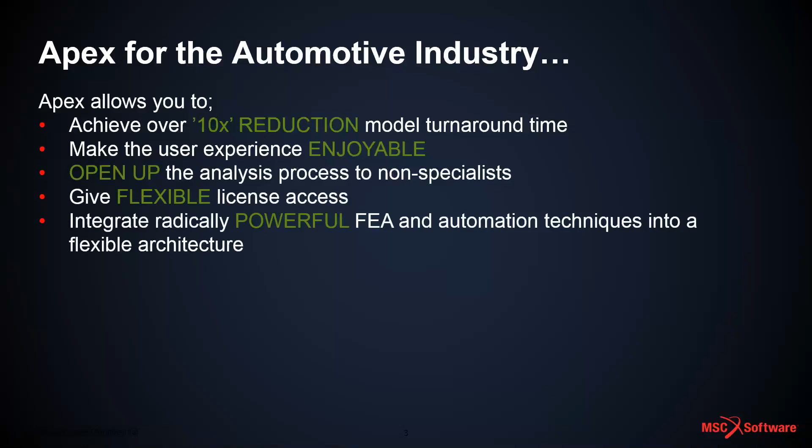Within Apex, as I mentioned, there are some very powerful FEA and automation techniques built into a flexible architecture. Apex is one of the very few direct modeling geometry engine enabled CAE platforms, and is also generative in the sense that model changes upstream are flushed all the way back to the beginning, resulting in minimal manual intervention by the user and hence massive time savings in terms of build, solve and post-processing.

These capabilities, or the need for an effective CAE tool set, is very prevalent within the automotive industry, both in terms of getting product to market and also the importance of robust FEA in the development process. And all of that said, Apex gives you, the engineer, the design freedom to develop your current and future products in a manner you have never seen before.

And trust me, this has changed the way that we work in our engineering consultancy, and hopefully you will see some of that yourselves. So, the Apex journey.

So Apex was first released about 4.5 years ago. Some of the early releases were focused more on the sort of CAD to mesh type stuff with the direct modeling geometry engine that I mentioned - very easy to use, very fast to build models and very fast to update.

We then moved on with subsequent releases to include the Apex structures embedded solver, and that was very useful in terms of running the full design loop or the full analysis loop and making changes, any iterative modifications we need on the structure to ensure integrity.

Then we moved into the integrated and revolutionized flavor of Apex, for want of a better term, with some of the later releases. The key enabler here was the inclusion of the Python scripting language application programming interface, so the Python API, which effectively means that Apex can be customized and automated almost beyond any boundary in terms of user input and company best practice.

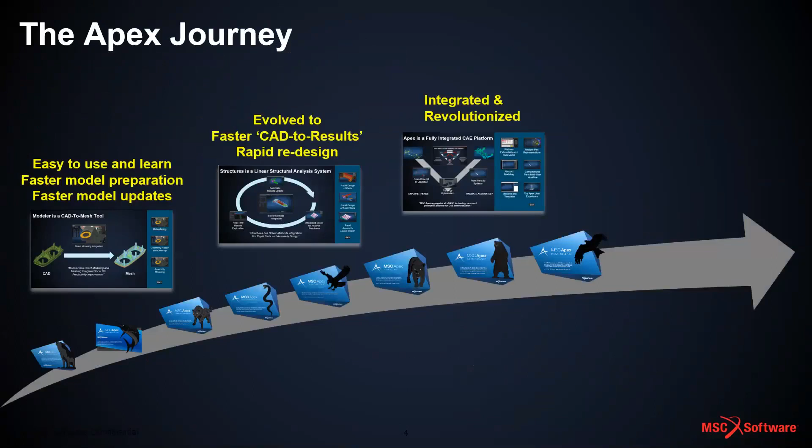So that said, listening to the market, MSC decided that there was a subtle change required and a paradigm shift to enable the latest release, MSC Apex Iberian Lynx, in terms of its interoperability with MSC Nastran. We've opened this up with this release - we're calling it a gateway to Nastran, or Apex for Nastran, in the sense that Apex can now write fully functioning model data files out of the Apex environment, be solved externally with Nastran, and then post-processed for result exploration back in the MSC Apex environment. That's all been achievable with the latest release, Iberian Lynx, which we'll be focusing on today.

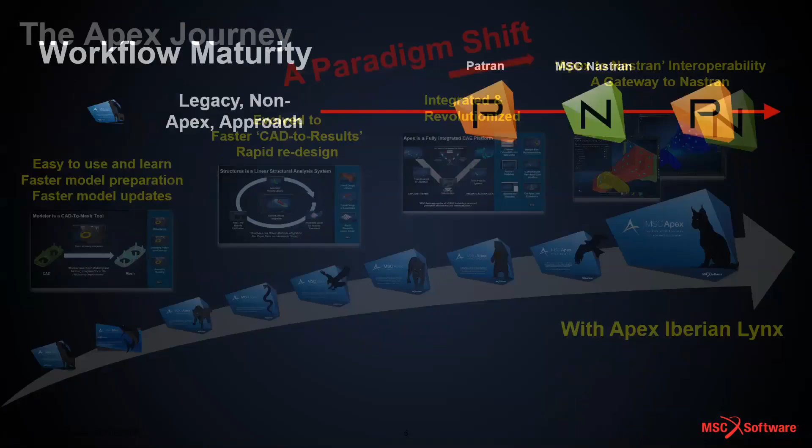In terms of workflow maturity, and I'm sure many of you will be familiar with this, before Apex was around, the legacy approach would be focused on Patran or third-party tools for both pre- and post-processing, wrapped around the sort of core Nastran functionality that's used across many industries and definitely across the automotive industry.

As Apex came in, very, very powerful over legacy tool sets in terms of the CAD to mesh type operation, but somewhat limited in terms of the finer points of the nuances of model build in terms of model attribution, loads and boundary conditions, load case setup, that type of thing. So it was used as a companion where it would be focused upstream of Patran or another third-party preprocessor before then the Nastran solve, and then obviously we'd be looking at some of the tool for post-processing.

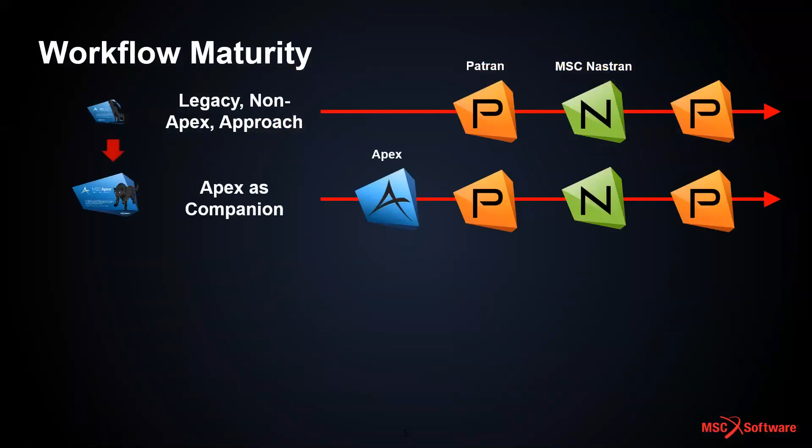As Apex has developed in maturity, it became a fully functioning preprocessor. So the full model can be built in the Apex environment, certainly for given analysis types, then run in Nastran, but then we were limited to not being able to post-process, so we had to look elsewhere for that activity. But now, with the introduction of Apex for Nastran through the Iberian Lynx release, we now have the fully functioning preprocessor, Nastran solve, and then fully functioning post-processor for result exploration.

Okay, so we'll just talk about some of the functionality growth. So Apex, in its companion mode through some of the early releases, supported a number of Nastran keywords, but was quite limited in terms of analysis support. Once we then moved into additional releases, we've now got Apex as a fully functioning preprocessor, so we've got more keywords supported, both import and export, and also the ability to set up for a number of different solution types. We then move into the arena where we are now with Apex Iberian Lynx.

So we've got far more mature MSC Nastran keyword support. We've got analysis setup and solution types for external Nastran runs, but also using the embedded Apex structures solver technology. We've also got the ability to explore results through the Nastran external results HDF file format that can be imported into the Apex environment. And we've also introduced at this release the concept of orphan mesh support, whereby we can read in legacy Nastran bulk data information.

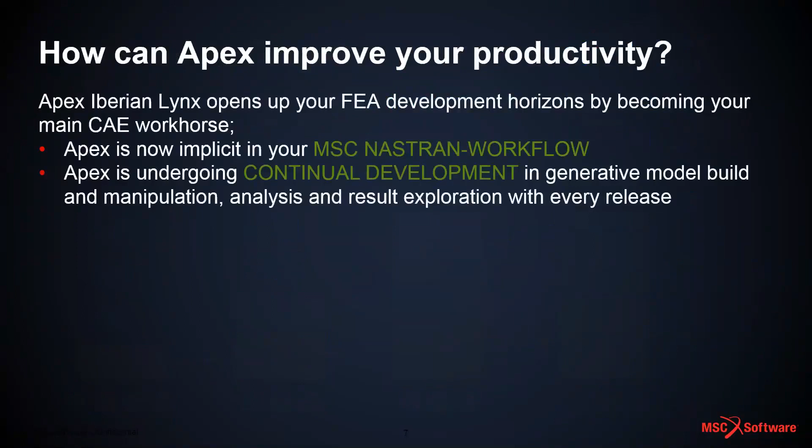Okay, so how can Apex improve your productivity? Apex is now implicit in many MSC Nastran workflows. So we're now at a stage where some of your legacy pre and post processing technology, in simple terms, can be ditched and replaced with Apex to see full advantage in terms of the efficiency gains and ease of use that we've got. Apex is undergoing continual development with every release, both in terms of model build and manipulation, analysis and result exploration.

We have, as I mentioned, the Python-based automation environment, so we can automate many aspects, or pretty much all of the aspects of the model build process. But with the advent of Iberian Lynx, we now can automate analysis and results exploration up front. And this is all enabled through the customizable graphical user interface, and we now have the ability to allow users to create their own tools and forms to almost their own company specific workflow.

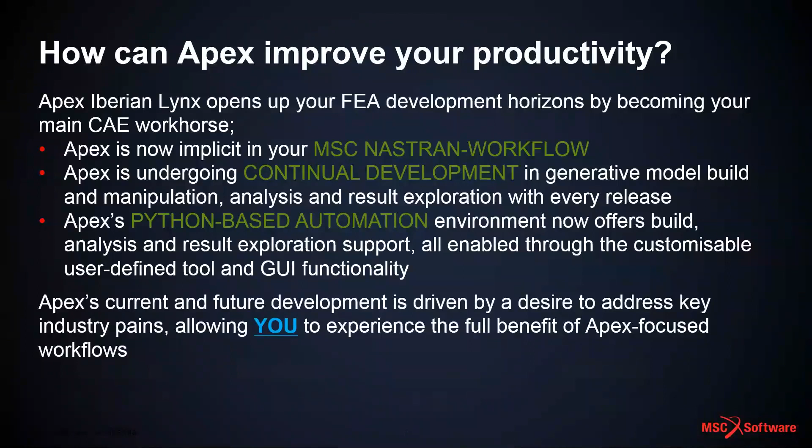Key thing here is that the development of Apex is totally focused on a desire to address key industry pains. The key thing here is that you will be able to experience the full benefit of Apex focused workflows now and in the future.

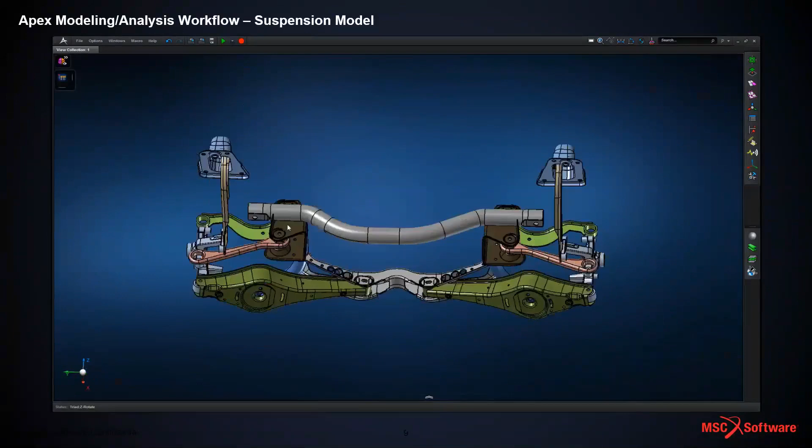Okay, so with that said, we're going to move on to some demonstrations now, looking at typical automotive industry focused functionality. So the first thing I want to look at, and some of you may know the Apex environment, some of you may be new to this environment, but I just wanted to give you a flavour of a very simple build, but some of the functionality that we've got. So this video is based around the model build for a suspension assembly. So this geometry has been read in from an external Parasolid CAD source, and we can see some of the key components in here. We've got the knuckle, the upper and lower control arms.

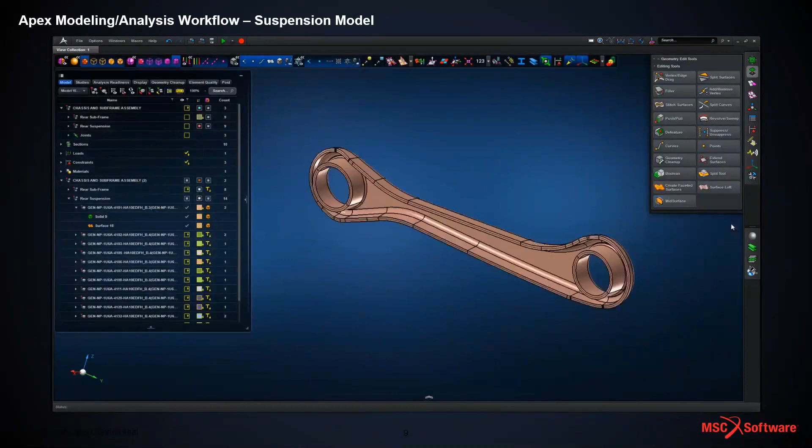So if we focus on the lower control arm first of all, just to illustrate some of the simple yet powerful model build capability we've got. So this is a thin formed structure. So we're just going to mid-surface that structure using the default options in Apex. So we've got a surface that's fully tied together. We've got the shell properties generated by default.

We mesh that surface to give us our 2D shell mesh for this type of thin shell structure. And we can now check our element quality. So we get a live feedback in terms of our element quality update. And we can see we've got a number of invalid elements. So we've got some very thin faceted surfaces.

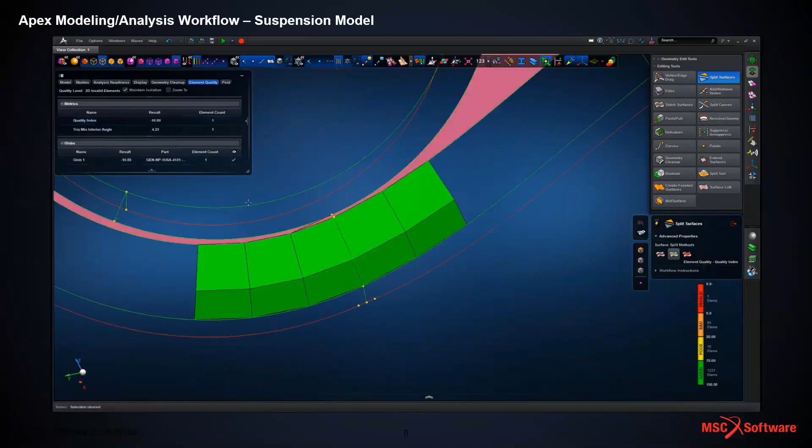So we're going to just use some of the geometry manipulation tools. And again, Apex being generative, the geometry is tied to the mesh, which is in turn tied to the property, and also the element quality in this case. So as we make these changes, we update the geometry and the mesh, and the poorly shaped elements disappear from view, and we've removed them from this part within the master assembly. There's a number of ways of doing this, but this is just illustrative of the generative nature of Apex.

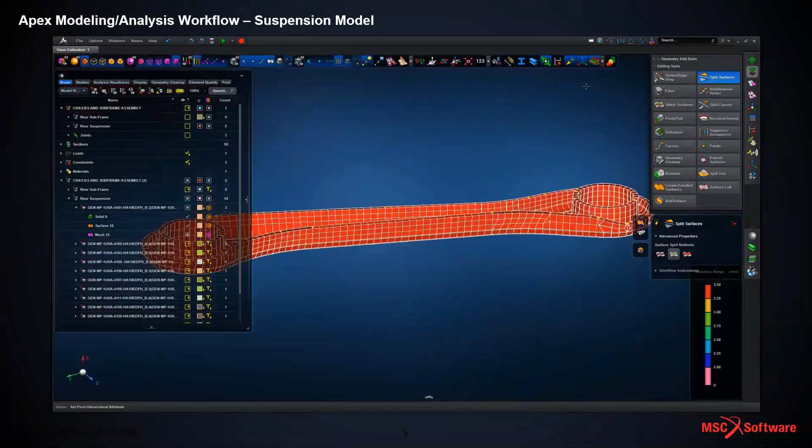So if we now view the resultant mesh, we can now check things like the resultant shell thickness. So we haven't had to re-attribute properties. They're all tied through again through the generative nature. So minimal mouse clicks, big time savings potentially for more complex models.

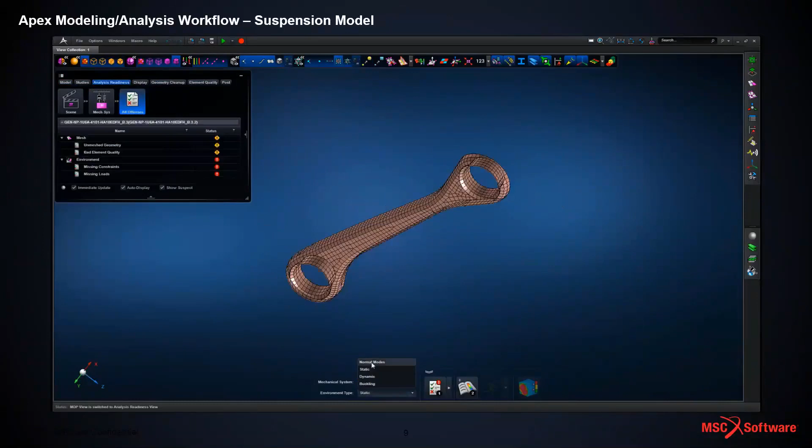Verifying element normals. And then one key thing that we have within the Apex environment is the ability to run the Apex structure solver. Now this could be for production level output, but in this case we're using it for a simple verification run, just to make sure that this part of the model is tied together and is working as a true FEA description of the part we're trying to represent. So we're just running a simple normal modes analysis.

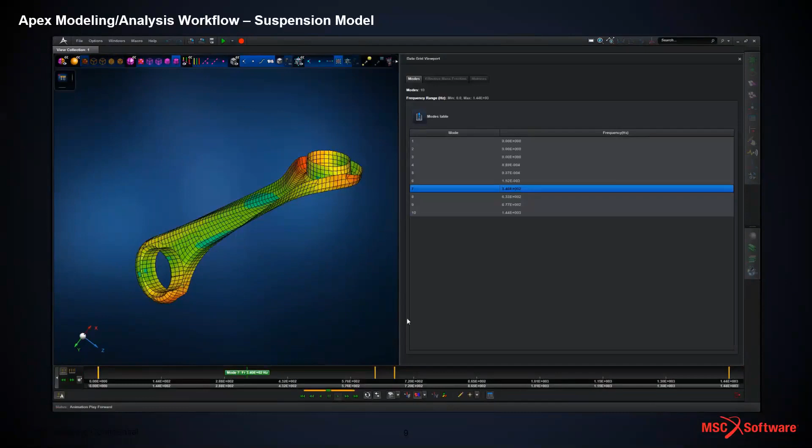This takes us through into the post-processing environment, and then we can look at the table of modes and the frequencies that are developed, and just look at the mode shapes just to ensure that they make sense and the structure's tied together. So obviously this is a free normal modes analysis, so the first 6 mode shapes are rigid body.

So once we've built all the parts and verified them within the assembly, we can bring them all together. This full model process with static load output took less than an hour, so we have very good efficiencies in there. So some areas of the model where we've got parts which will be welded in reality, we're just going to idealize that connection with a glue contact meshless technique just to fasten 2 parts together.

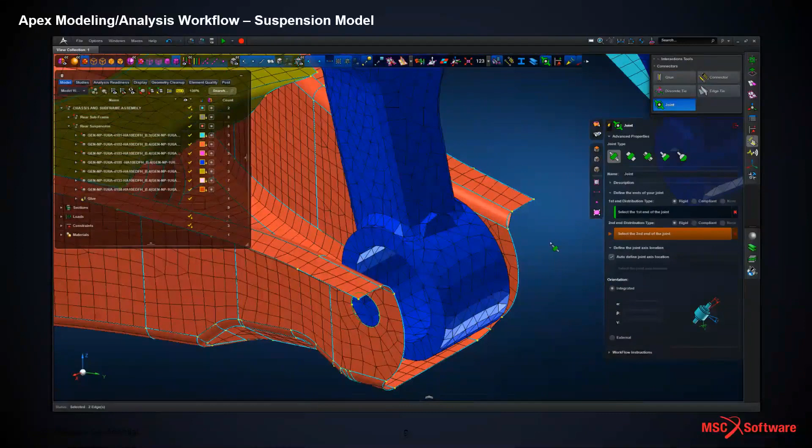We've got the concept of joints, which are new to the Iberian Lynx release, and this allows us to specify many different types of joints. So we're going to specify a revolute joint, which is representative of a pin and a shaft with a bearing connecting these 2 parts together. So we just specify the end curves connecting the red shell component or the pinky shell component into the face of the blue detailed mesh component, and middle mouse button to accept.

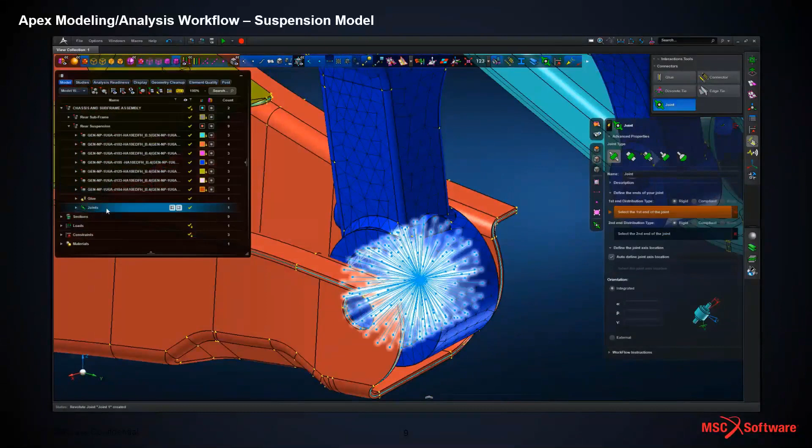We can modify the position and the orientation if necessary, but these are concentric holes, so we're good to go with the good quality geometry. So we can look at the joint definition. We have it in the model browser tree.

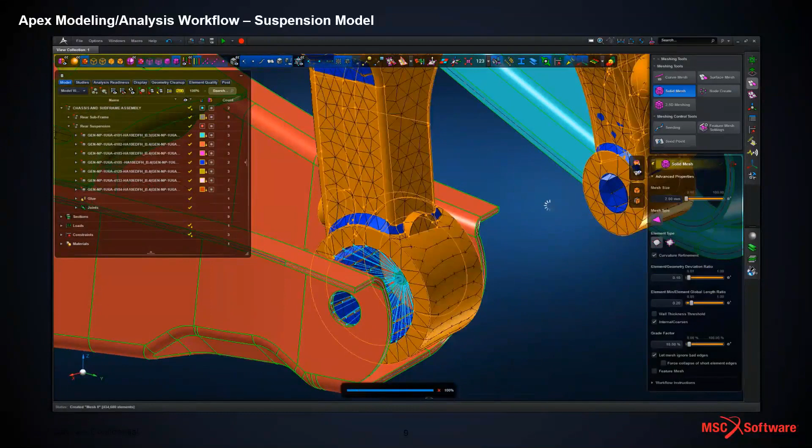Once we've got that defined, we're just going to illustrate here again some of the generative nature of Apex. So we're going to remesh the knuckle, the solid mesh knuckle in this suspension assembly. So as that mesh is updated, the joint is updated as well. So the generative nature of Apex has flushed those joint connections through to the newly defined model.

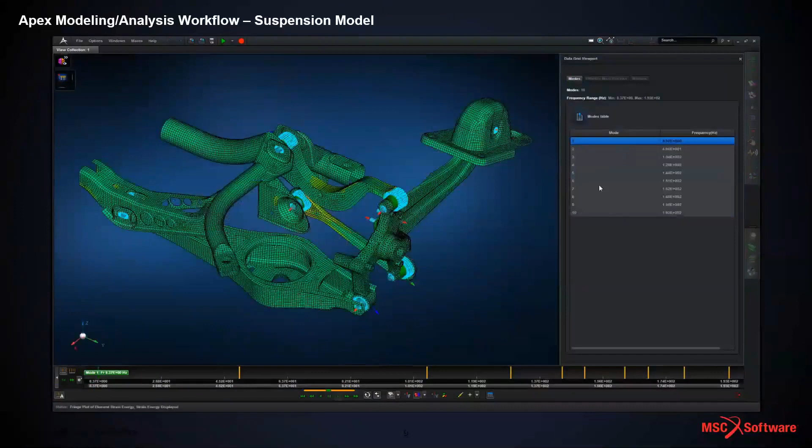Running a normal modes analysis, just again as a verification, we can see how those revolute joints are working and that the structure is all tied together and behaves as it should for a structure of this sort. Again, just a quick strain energy plot to show where the peak loads may well develop from a dynamic load case.

So we're now going to run, just for illustration, a simple static load case, linear static. So we've got a number of constraints and a symmetry boundary condition. Again, very straightforward to define this in Apex. And then a very quick response, both in terms of the shell and solid stress output. We're just looking at von Mises for the lower control arm, just as an illustration of what we can do with Apex.

So again, just an overview. Took less than an hour to build that complete assembly, so hopefully some idea of the efficiency gains that we can see, and obviously we can take that on to more involved models at your leisure, really.

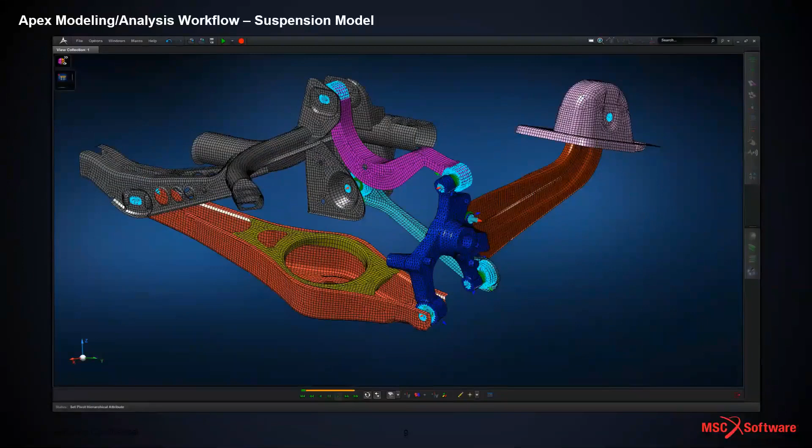Okay, so looking specifically now at how Apex interacts with MSC Nastran. So Apex can be fundamental to your current and future MSC Nastran. I'd probably caveat that to say that Apex is fundamental to your Nastran-based workflows, in the sense that we have now enhanced MSC Nastran keyword support for both model import and export, and the bulk of this is obviously default Apex behavior.

Obviously with the Python enabled automation environment, we can extend that almost on a company by company basis. We've got the ability to interrogate results through the attachment of the MSC Nastran new format, the HDF5 result format. Well, I say new, it's been in industry for a number of years now, but we can take advantage of the powerful result exploration and automation capabilities within Apex.

And then this simple infographic just shows on the left hand side the number of supported BDF keywords which can be imported and exported from the Apex environment, across coordinate frames, multi-point constraints, materials and properties, model definition, and loads and boundary conditions. The red bars are one of the early Apex releases, Diamond Python, and now the grey bars show Iberian Lynx, and we've got a massive increase in the number of supported keywords.

On the right hand side, I didn't really want to bore anybody with table after table of supported keywords. This is just a word cloud that shows some of the range and breadth of keywords supported within the Apex environment.

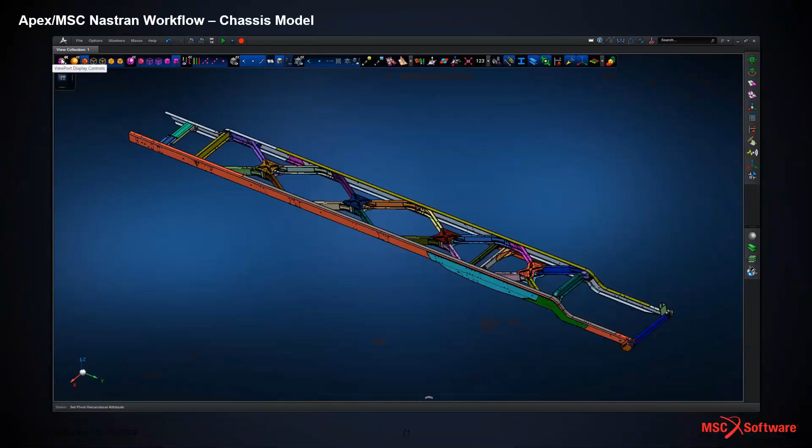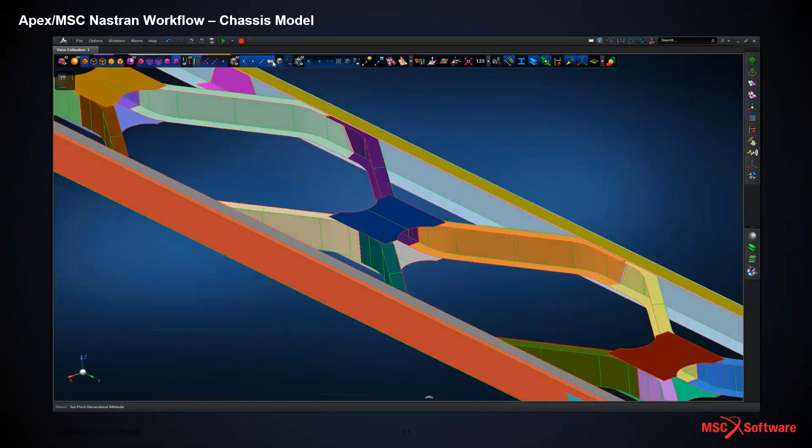Okay, so look specifically at the MSC Nastran workflow. This is for a slightly more involved model now. So we've got a chassis model with maybe 120 discrete parts in it, and I think this came in as a CATIA assembly. So we've got the original solids. We've been through some mid-surfacing operations, again very straightforward, using the direct modeling geometry engine in Apex. We can look at the resultant mesh.

So we've got a reasonable mesh distribution for global stiffness and strength cases. We can look at the shell properties that have been defined by default as part of the mid-surfacing. And one aspect we touched on earlier is the ability to do a meshless connection using glued contact, which is prevalent throughout many aspects of Apex. That showed the glued contact, which in fact is a series of explicit MPCs under the hood. And we look at the glued contact on the sub-assembly level for one of these cross braces, and see how the model is tied together.

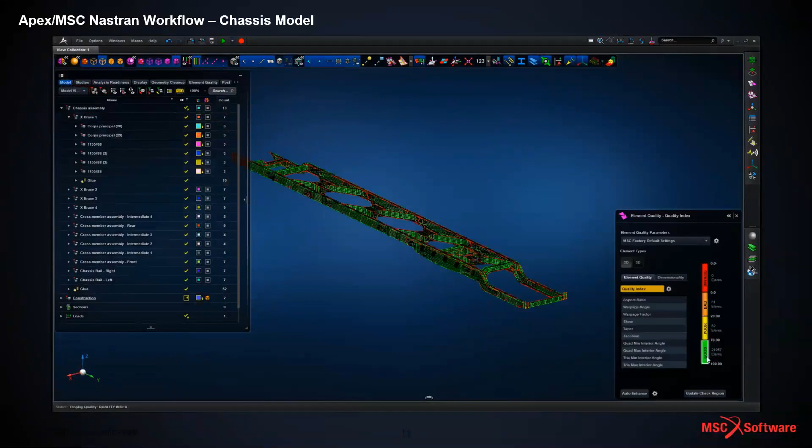And of course, we could run a verification load case or normal modes load case at any level within the model. We're just doing a quick check here on element quality. We could check free edges, element normals, that type of thing. So once the model is built, we can apply a number of constraints and some forces and moments into the structure. Again, a very simple load case, but illustrative of the type of stuff we can now do within Apex.

So once we have the model built, we can now place what we call an analysis study. That effectively becomes the target for the model, and we can specify that we want to create a scenario, so a single or a series of load cases, and we've got full control over that definition. And once we've got that, we can export the Nastran data. We can set the units. We can specify whether we want to export a single file or a multiple include file basis.

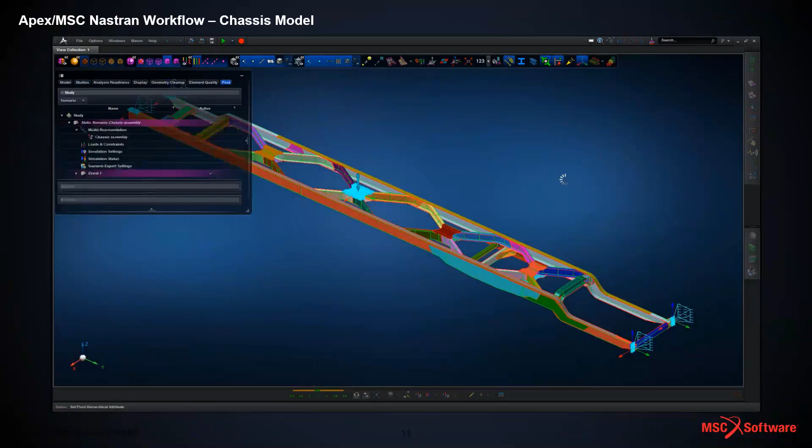And once we've run the Nastran job, we skip the step here, we can then read the Nastran result file back into the Apex environment, go into post-processing, and we've got full control over the contemporary result exploration tools available in Apex. So just a very quick animated fringe plot looking at von Mises stress across the shell elements. Pretty straightforward, simple structure, but very quick to build and verify and get production level results out.

Okay, so the next quick demonstration is the concept of the orphan mesh workflow, again for this chassis model. Just to reiterate, orphan mesh is when you work from the source bulk data file, maybe a legacy Nastran model. You perhaps don't have any CAD to support the full model build, but once that geometry is read in, you can remesh, regenerate, and modify the mesh at your leisure.

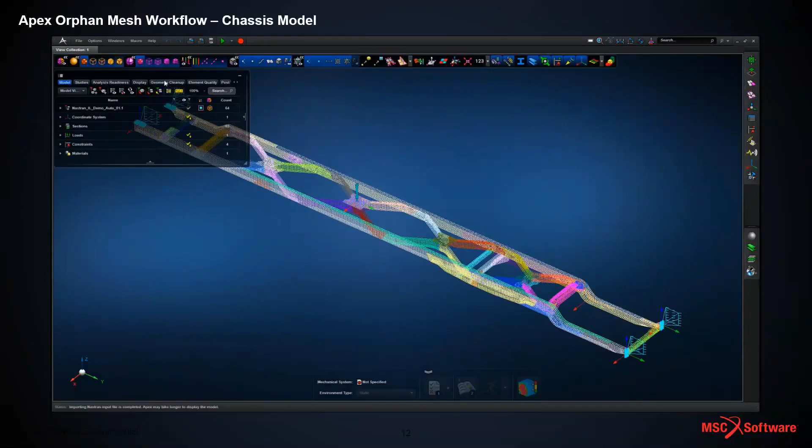So we're specifying the import of the original bulk data file for this chassis model. We can specify the unit system and how we want to organize the model. We're importing this model as a series of contiguous mesh parts, so each discrete mesh has its own part within the subassembly, which makes it very easy to manage from the model browser tree. And we can see some of the local detail as we looked at previously.

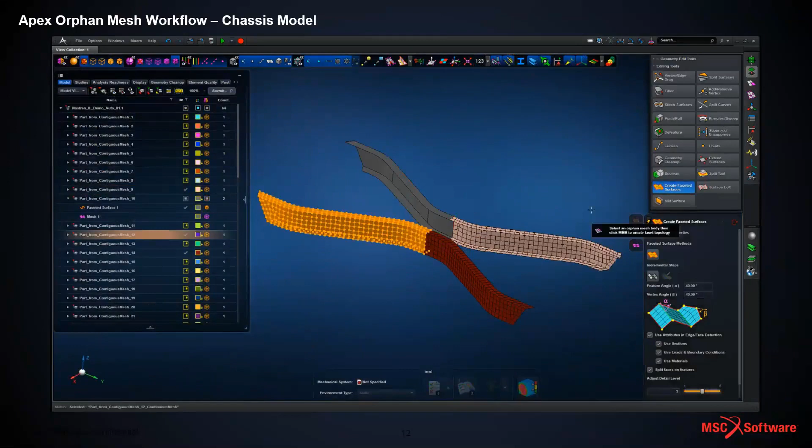So left-hand side now, as we click on those entities, we can highlight them in the model browser tree. And what we're going to do is convert that mesh, the orphan mesh that was read in, into a series of faceted surfaces, so into a series of geometric entities. As we do this, the shell properties that are used to populate those surfaces are stored internally, and we are now in the position where we can remesh, modify this geometry to give us the structure that we want to see.

So bringing the original mesh back into view and then highlighting those meshed entities that we've used to generate faceted surfaces within the model browser tree, we can now delete those original meshes. They're no longer required. They're surplus to what we need to do. And we're left again with faceted surfaces, as you can see in the browser tree, and these surfaces can be exported to CAD if necessary.

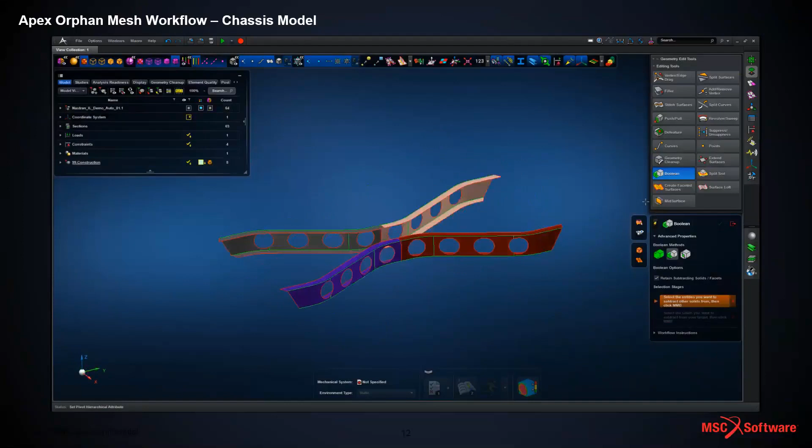So once we've got those faceted surfaces created, the original mesh removed, we're going to modify them. We've just got some simple operation here. We've created some cylinders which we're going to subtract from those original surfaces using a Boolean operation, again using some of the very powerful direct modeling geometry tools. Remesh those faceted surfaces. So those surfaces now are populated with the original shell property. We can modify those if necessary.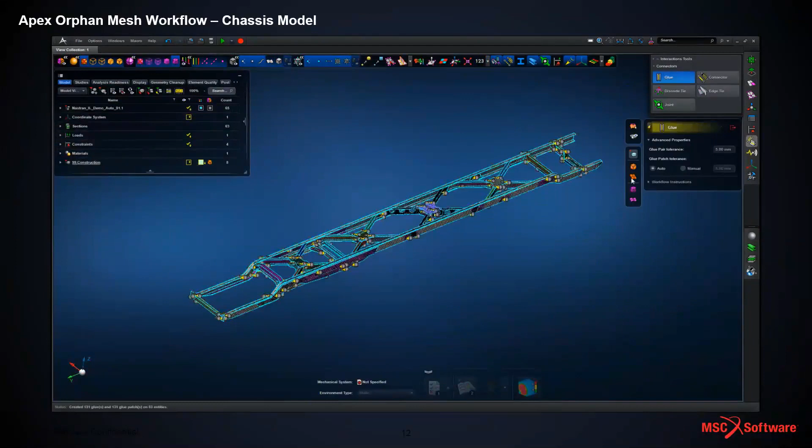Bring them back into view, bring the full model back into view. We're going to use the glued contact to tie this all together. Again, single sweep based on the glue pair tolerance, and we're good to go in terms of our analysis. So we're solving this using the Apex Structures Embedded Solver, and again we can now see the resultant deformation, obviously massively amplified.

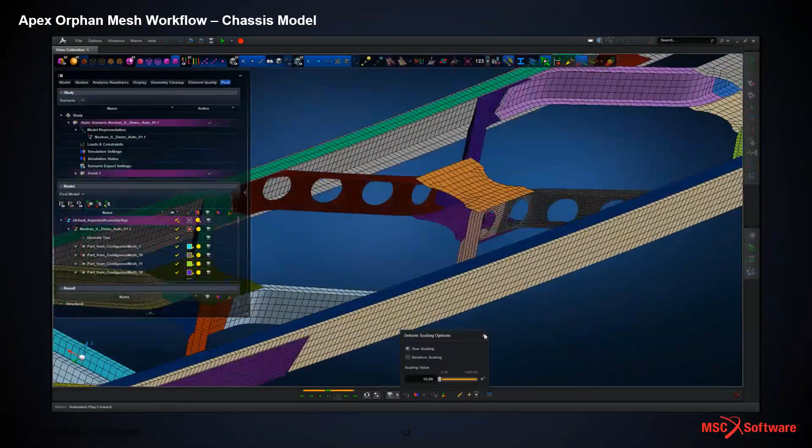So we're just going to change the scaling for the deformation plot, bring it into view to make more sense. So we've got 10 times true scale at the moment. We can animate at that level. Obviously this is a linear static analysis, so we wouldn't want to go too high into our displacements. And we can look at our von Mises stresses and the influence that our orphan mesh modification has had on that overall structure. So we're good to go there.

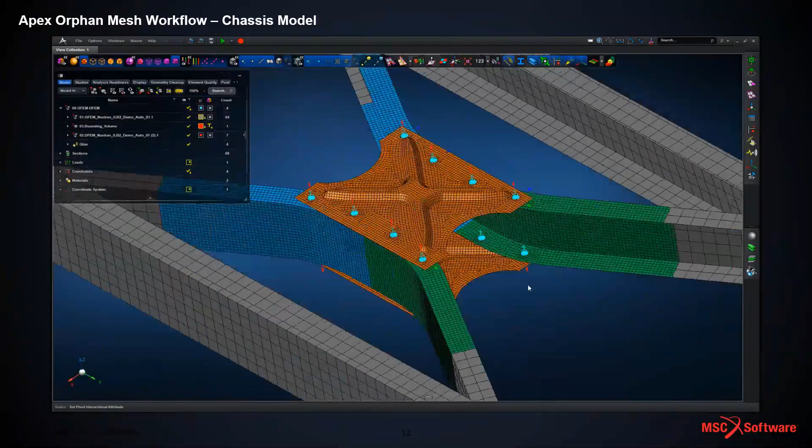This is a second example where we're tying orphan mesh geometry, so remeshed entities in the blue and green regions, with some imported CAD for the orange upper and lower plates. We've glued the fine mesh to the coarse mesh, and we've defined a series of connectors to give us our true fastener definition at the joints if we wanted to extract joint loads or fatigue loading around those joint regions. So very powerful techniques for that orphan mesh type workflow.

Adams is very prevalent as a multi-body dynamics tool within CAE, and especially in the automotive industry. So Apex can now be used very nicely with your MSC Adams multi-body dynamics workflow, with the ability to generate valid or quality FEA models using some of the Apex analysis readiness tools for subsequent modal neutral file MNF generation. So what we're doing here is effectively defining what we call the flexible bodies for inclusion in a downstream Adams multi-body dynamics analysis, and Apex can help us with that.

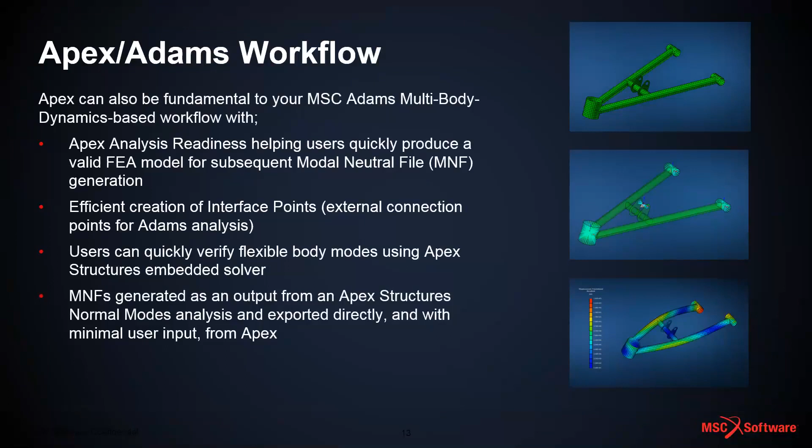So once we've got the geometry and the model built, we can create the interface points within the Apex environment, and these will act as the external connection points within the Adams analysis. Again, very straightforward to do that. We can verify the flexible body modes using the Apex Structures Embedded Solver. And once we've got those modes, we can generate the modal neutral file or files as an output from a normal modes analysis, and then export them with minimal user input from Apex directly into Adams for subsequent downstream work.

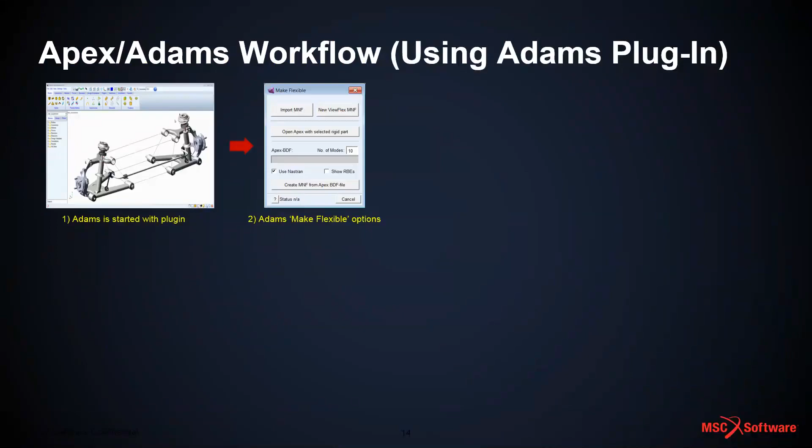So just to illustrate how that could work within Adams, so opening up the Adams environment, and some of you may or may not be familiar with Adams itself, but we start Adams, we specify for the bodies within a given assembly. So I should add that as we start, these bodies within the suspension assembly are all rigid body, so it's just a plain kinematic study. But we're going to make some of these entities flexible. So we go into the make flexible options within Adams.

We can open Apex. This can be scripted to work automatically behind the scenes. Open the geometry and their attachment points, and then generate the modal neutral file or a Nastran bulk data file. So if your Apex process is to support Adams and Nastran, then you'd obviously create a Nastran bulk data file. If this is solely for an Adams workflow, then you'd create the MNF directly within the Apex environment.

Once that data type is available, we go back into Adams, into the make flexible form, and then we can either read the MNF file in directly or execute Nastran to generate the MNF file explicitly in its own right, and then associate the MNF file with the assembly we're working with.

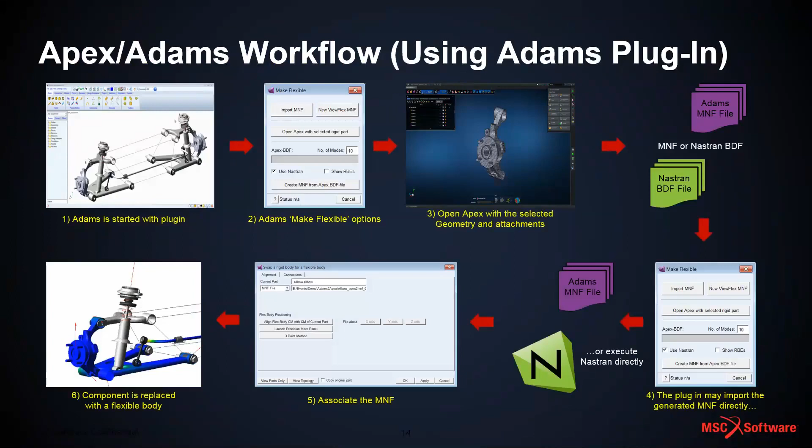So we're swapping a rigid body for a flexible body, and then bringing that in, and now the component is treated as a true flexible body based on the MNF definition, and Adams now becomes a true flexible multi-body dynamics simulation environment.

Okay, so one thing that's come up with a number of the webinars, we've actually repeated a similar webinar for the aerospace, the shipbuilding, and the large fabricated structure industries. And this is prevalent for the automotive industry as well, is how is Apex at handling welded structures? Well, there are many different ways of tying models together within the Apex environment, and Evotech, the company that I'm involved with, we've developed a 25-minute tutorial all focused around Apex, looking at different techniques. So we've got weld simulation techniques such as nominal stress, hotspot stress, and effective notch stress methods.

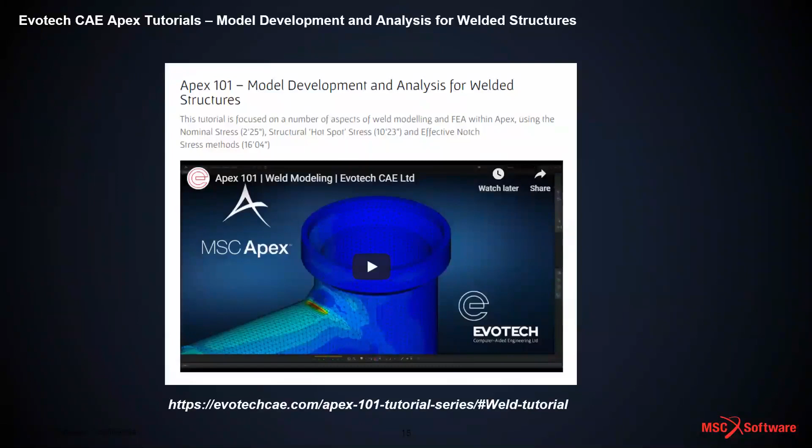Okay, so a bit more on weld analysis. So this is some work that's been done by a partner company, and they're focusing Apex on a different workflow again. This is to use another MSC technology, Simufact Welding, whereby the model is built and then prepared for external analysis within Simufact. So this script runs with marginal user input, mainly to answer any questions that pop up from the script, and then works with the geometry and builds the model.

So I'll just play this demo, and you'll get the gist of what's going on. So again, using the Python API environment, we're going to run a script. So first of all, we specify the CAD file that we want to work with. So a Parasolid file in this case. We specify some spot weld locations from a CSV file. We specify the radius of those spot welds. Those are generated automatically within the Apex environment using the script, and the overlying CAD is brought in.

So you can see here we've got the smaller pinky orangey region that's going to be spot welded to the larger bonnet region or floor pan region, wherever it is. So Apex is running, and if you can see in the top right hand corner, it's running through the instructions. So we're splitting surfaces based on those weld locations, meshing both the smaller and the larger regions, just running through, obviously no user input to do this.

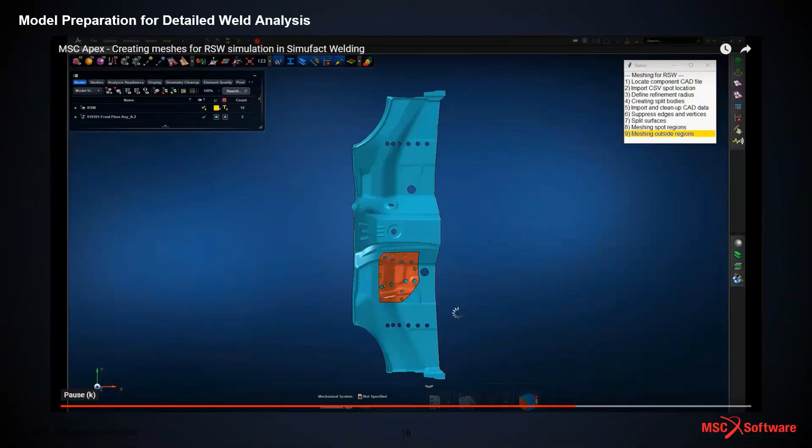It's a pretty detailed model, so it does take a few seconds to run through, but we can now see the resultant mesh. We get a message that the script has run appropriately. So we can see now if we hide the spot weld locations, the Simufact Welding zonal definition for external analysis. So that will be read out and then analysed and post-processed in the Simufact environment.

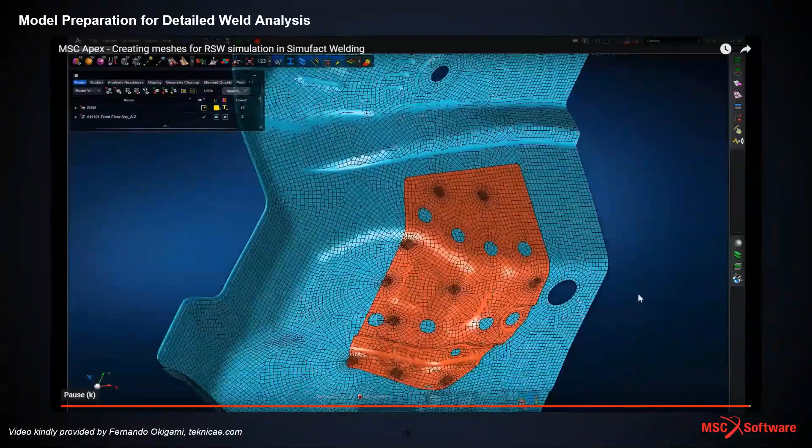Okay, so that pretty much covers specifics for the automotive industry. We're just going to look at some enhancements that have come in through Iberian Lynx. These will be new for anybody, especially people who haven't seen Apex before, but just to give a flavour of some of the developments that have gone on.

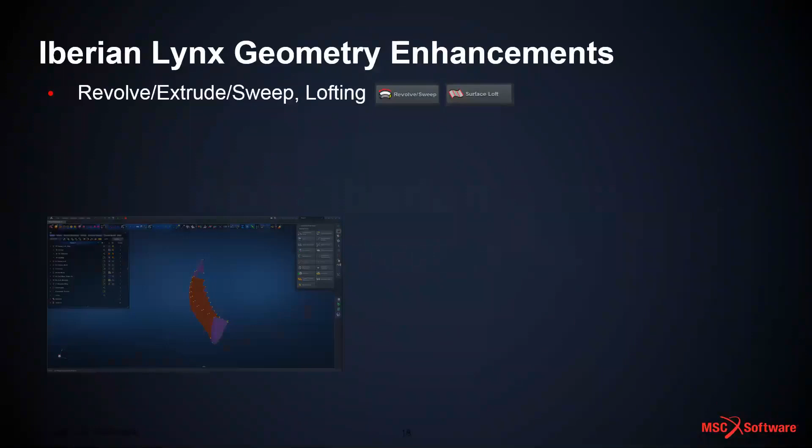We now have a number of geometry enhancements, so we're pretty close to a fully functioning CAD type system in terms of the geometry creation and manipulation within the Apex direct modeling geometry engine. So we now have revolve, extrude, sweep, and lofting, and this simple model just demonstrates some of those techniques. So we have this kayak structure, or simple series of surfaces.

So we're going to loft a surface, so that involves selecting non-connected edges, and then the surface will be lofted across those discrete edges as we select them. So we get a visual update of what the surface is going to look like, and once we're happy with those, middle mouse button to accept, and the surface is generated as we wish. And again, we've got tangency controls at all levels to control what we do here.

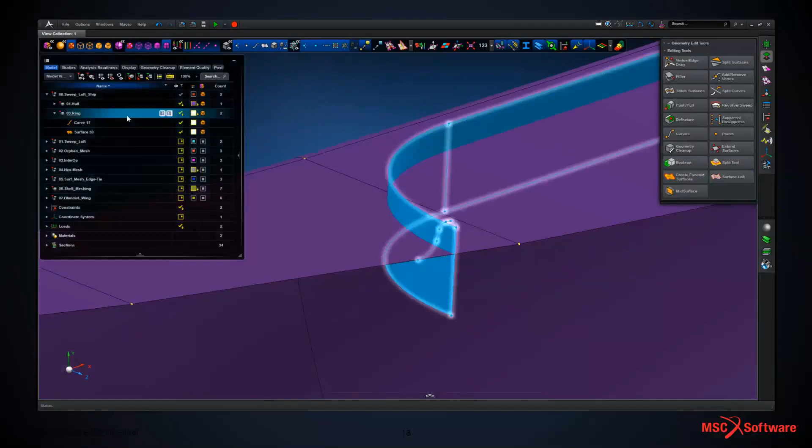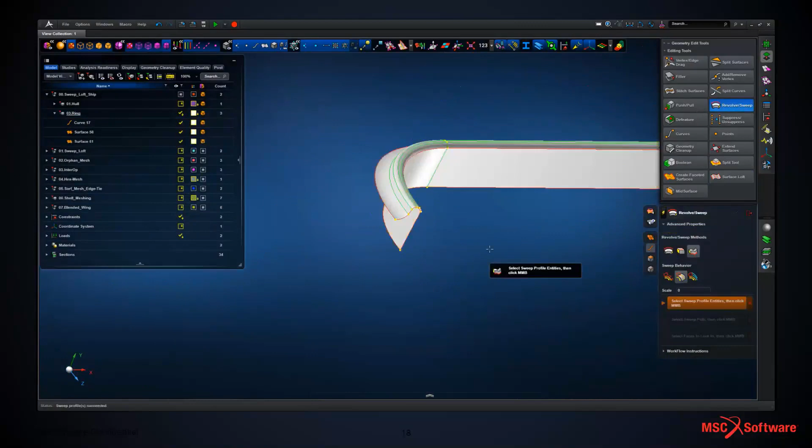Just looking quickly at an example of sweeping within the Apex environment. So we've got a curve that's going to represent the stiffener for the resultant kayak. So we're going to sweep that curve around the surface edges that we can see on screen now, and then we're also going to pick the surface faces to give us a sort of projection and normal direction, and we see a preview of that surface, middle mouse button to accept, and we've now got the full surface defined as required.

We've split the kayak based on the intersection of those surfaces, and then we can bring in the new geometry to suit and show how that sits together.

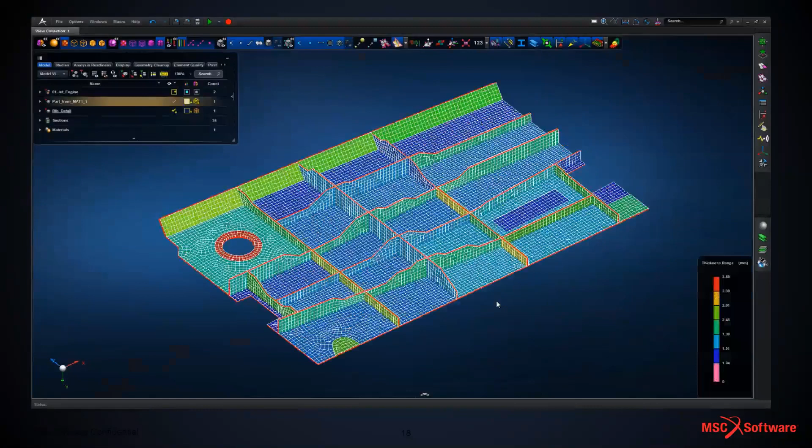We've got geometry from mesh, and we touched on this with some of the orphan mesh process, but we've got a quick example here of a machined component you may see in a typical structure. So bringing the orphan mesh in, we've brought some geometry in that represents a portion where we want some detailed solid mesh grafted into the shell mesh.

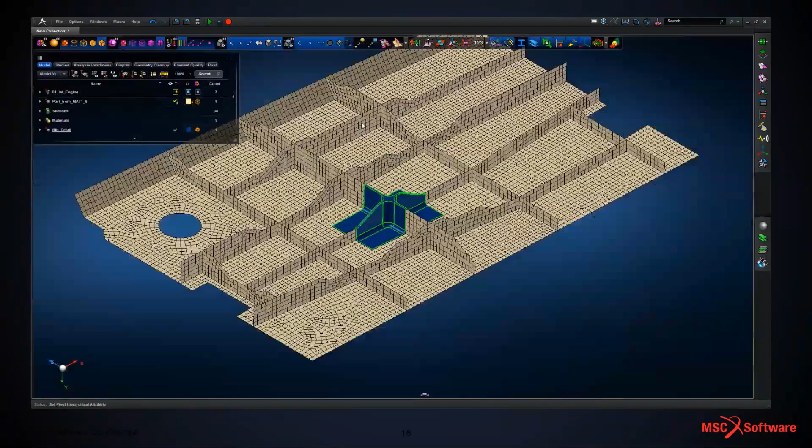So we're going to delete the shell elements in the region where we no longer need them, delete the geometry from view, and we can see there's a hole in the shell geometry. And we're now going to use the geometry tools to create a faceted surface from that underlying mesh.

Again, it's created the surfaces. This would work for flat, curved, or even doubly curved spherical type geometry. It's remembered the underlying shell thicknesses.

We can delete the original mesh, and we can now remesh and manipulate that geometry to give us any modification that we want. So here we may choose to seed an edge just to locally redefine what's going on, just as an example, but we could move edges around, that type of thing. And again, we've got the shell properties maintained.

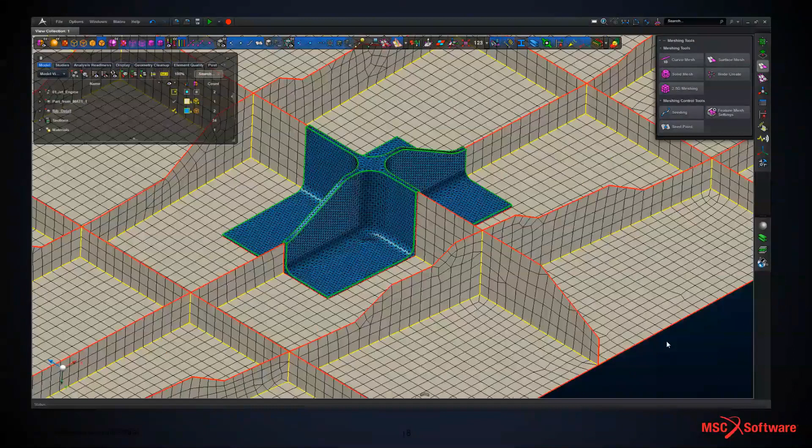Bringing the 3D mesh back into view that we've tet meshed in this case, so maybe we want to get some fatigue features at some of those machinings, and then we can glue the solid into the shell to give us the overall load transfer across the interface. Again, a very quick and robust tool to develop that kind of model.

Okay, so some of the Iberian Lynx meshing enhancements. So hex meshing: Apex has, for a number of releases, a very, very strong hex meshing capability. We now have the ability to diagnose some hex meshing potential workflows that we may see for typical structures.

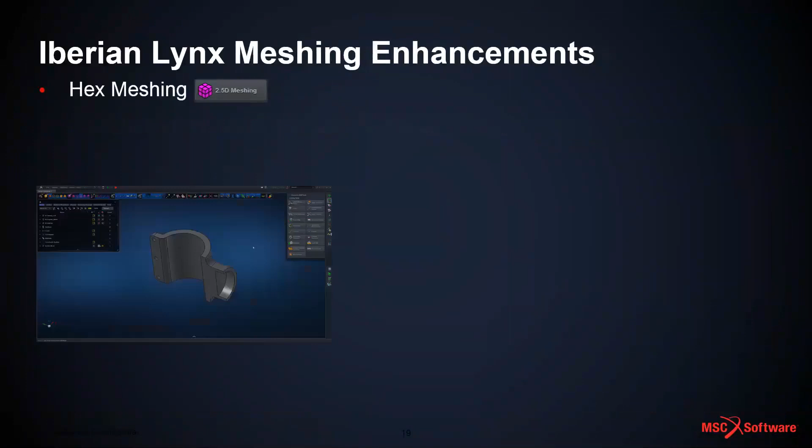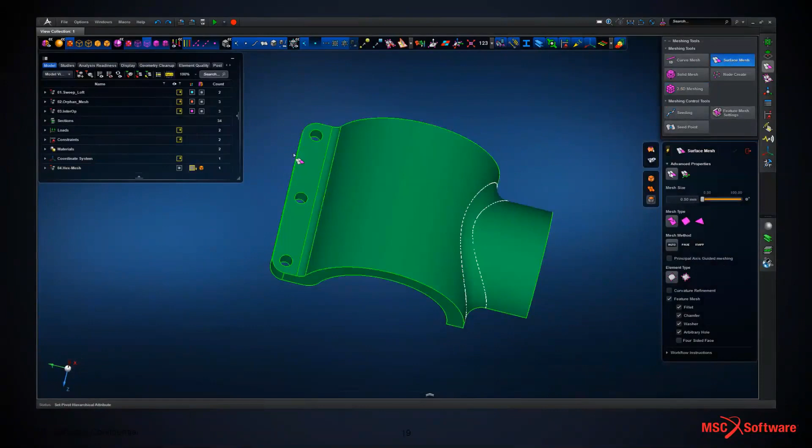So this is a simple machine or casting that we've got. We're going to partition the solid to make it hex meshable and use the standard hex meshing tool to develop those 3D elements. We've got some problems with element quality, so we're going to seed the faces using a 2D shell mesh dominated by quad elements and nicely formed quad elements.

But when we mesh this spigot region with quads, we see that the fillet appears in yellow indicating a Hex Mesh potential problem. So we can see there's a mismatch in the meshability, the seed across those edges.

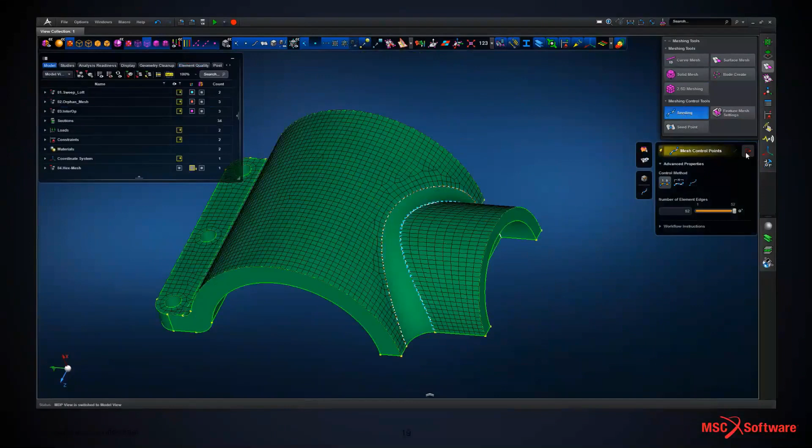So very quickly we can update that seed, go back into the Hex Mesh tool. The Hex Mesh now follows the seeded surface, and we've got very good quality in terms of the underlying Hex Mesh that's developed.

We've got enhancements in edge tie. So again, edge ties are a means of tying edges across parts contained within an assembly where we don't perhaps want to equivalence nodes. And we can see here, going back to the kayak model, we're maintaining two discrete parts within the assembly, and we've actually got a free edge between them at the moment. So we're going to use the edge tie technology to tie them together.

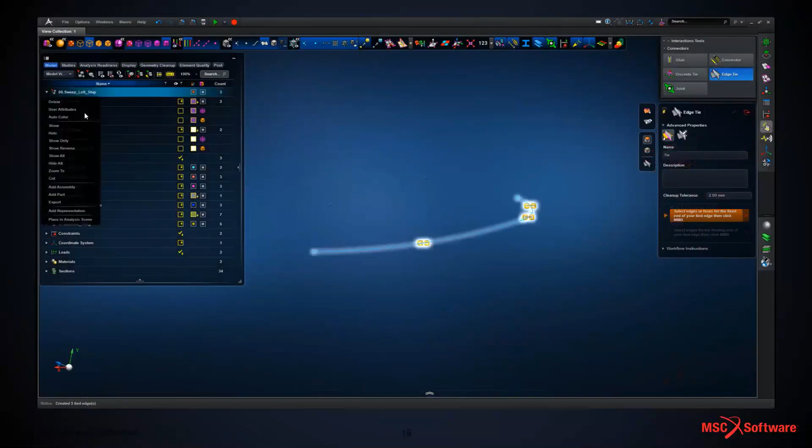So this actually creates a series of zero length R bars which are snapped together to give us a consistent nodal connection at those interfaces. We can look at the edge ties and check the free edges. By respecting the edge tie, we can now see that the structure's tied together fully.

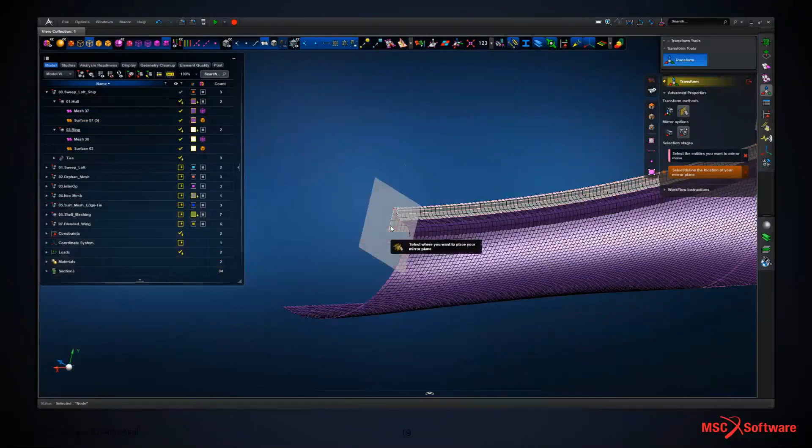Now, one thing that's coming new with the Iberian Lynx release is that we now have the ability to transform meshed models or FE models, and it will take the edge ties with it. So we're just mirroring this quarter model into the full kayak form. So just specifying which entities we want to mirror, specify the mirror plane, and again, we're getting good visual feedback here in terms of what Apex is about to do.

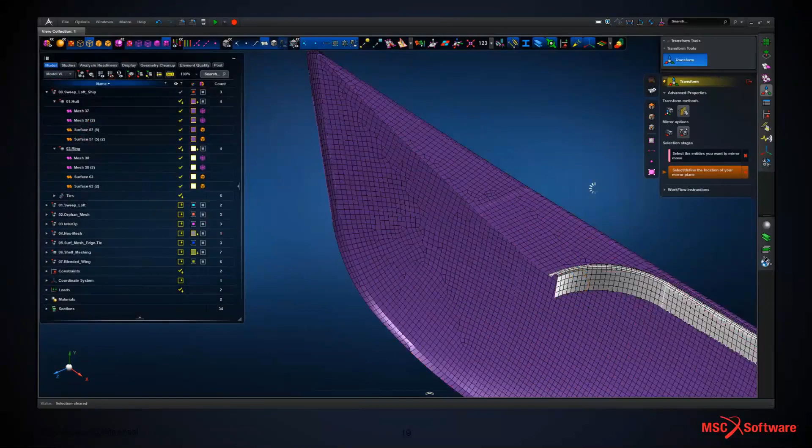So we're just rotating the mirror plane by 90 degrees. It gives us the update that we want, middle mouse button to accept, and very quick means of bringing that model into position and tying everything together.

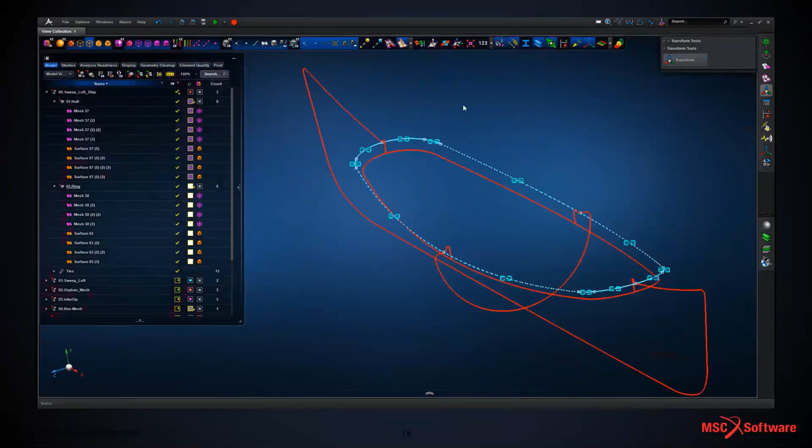And if we look at the edge ties explicitly, we can see that they've been copied as well as the full structure, and we can see the nodal connectivity at that level. So once we've got that, we could potentially just look at the free edges and then run a verification load case to show that we've got things tied together as they should be.

So almost a trivial approach now to build a fairly complex model. Massive time savings as we talk about with Apex.

We've got some advances in surface meshing technology, including the introduction of the incremental surface meshing tool, and also the ability to orient or modify the XY orientation for a given shell element. We can control shell normals, but now we can specify the angle or make parallel with a given edge the X direction of a shell element, which is useful for post-processing in some instances.

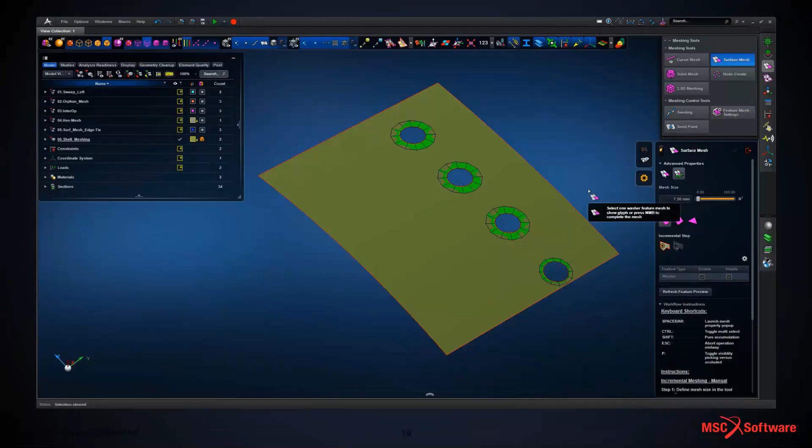A quick video to illustrate this. We've got a simple panel with some holes in it. The original surface mesher defines washer features around all the holes, but on this bottom hole it's too close to the edge, so it doesn't give us what we want. With the incremental surface mesher, we can see how those entities or that feature needs to be modified. So we change the width of the washer we're using, then go back in and remesh the full structure, and we've now got a washer that fits the geometry as required.

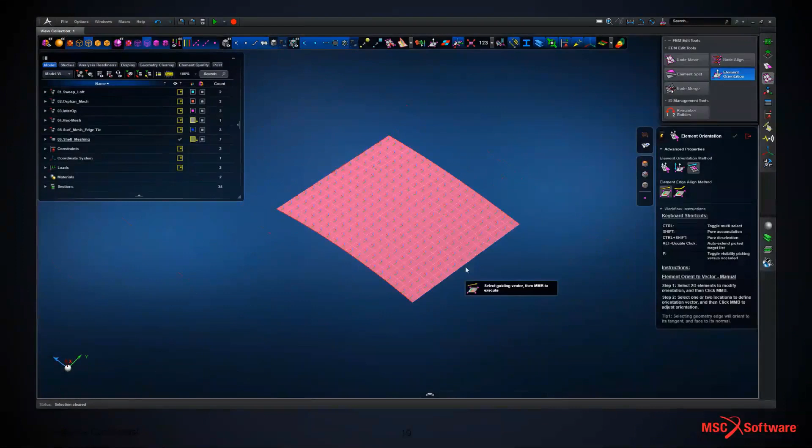The shell XY orientation changes the way the local coordinate frame works for a given shell element, and we can do this on an element by element basis. So that corner element we're swapping to point parallel with the short edge of the plate, or we can specify all of the elements to align with the short edge of the plate. Again, this is useful for post-processing in some instances. That's now available within the Apex environment.

We've got a number of Nastran interoperability enhancements. We've got better control now of ID management within the model, so we can specify starting ID and the ID range for nodes and elements. We've got the ability to create explicit coordinate frames, whether rectangular, cylindrical or spherical, based on manual input of position, and all of this can be automated using the Python automation environment.

We've now got the ability to explicitly create discrete ties. For the Nastran literate, discrete ties are RBE2 and RBE3 entity types within the Apex environment. So a quick example of how that would work.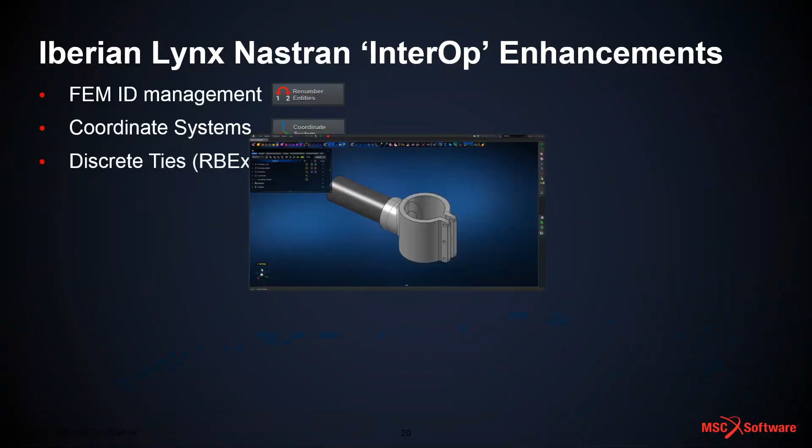We brought in this model. We've got a hex mesh of the bracket and a single beam mesh for the tube. We're going to manage some of the element and node IDs for the bracket: specify the starting ID, specify the part we want to modify, accept the defaults, and then if we look in the exported Nastran bulk data file, we can see both the element and the grid start with that numbering sequence.

We can create coordinate frames explicitly, so we're creating a cylindrical coordinate frame at the center of this geometry. The concept of Apex magic marker - we pick an edge and it automatically highlights the center of that edge. For an arc like this, it's very, very useful.

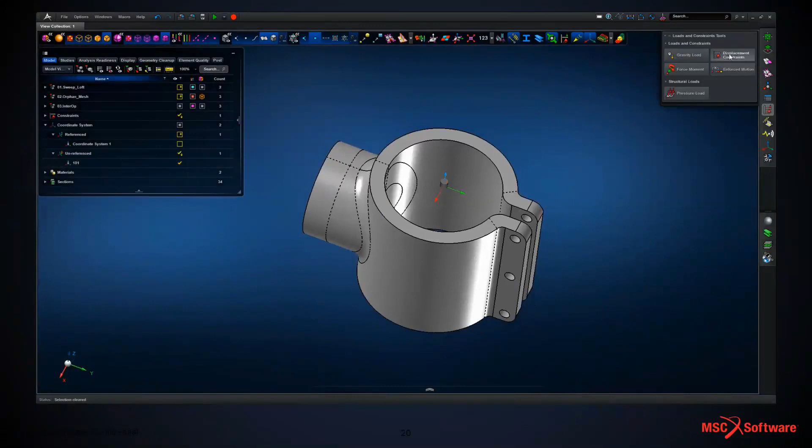We can use those local coordinate frames to specify lots of things. In this case we're going to look at a boundary condition, so we have internal faces of this structure, respecting that cylindrical coordinate frame, and create the boundary condition accordingly.

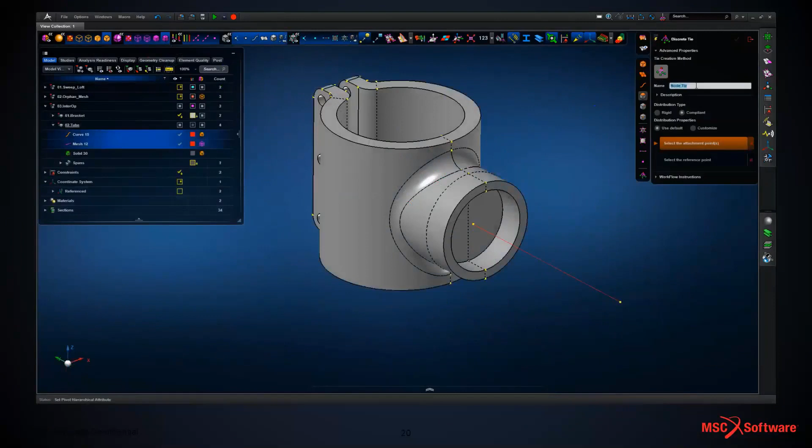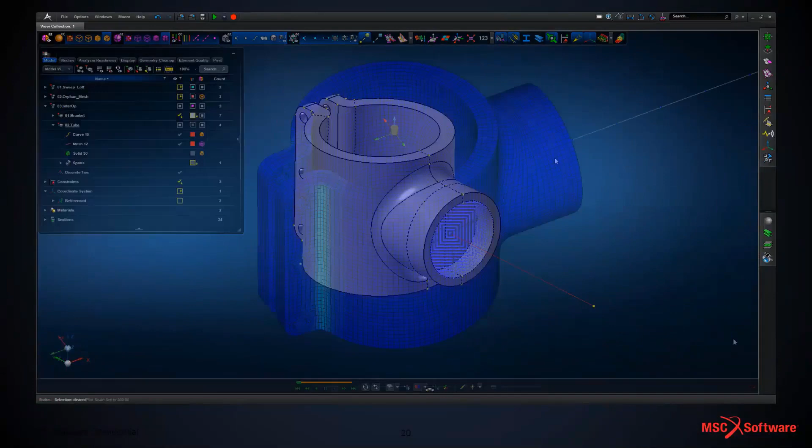Now we're going to use a discrete tie. This is a compliant tie, which in Nastran terms is an RBE3. So we're going to tie the internal faces of that geometry to the bar element that represents the tube. Again, single click - this is all fully generative, so any mesh updates would flow through to the rest of the model. We've got a very nice form to access for manipulating discrete ties and modifying them, much better than any legacy tools I've ever seen.

We can post-process using the local coordinate frame, so we're looking at the R, theta, and Z displacements as vectors. A number of improvements there, or enhancements, to allow you to work with Nastran data in a more transparent manner.

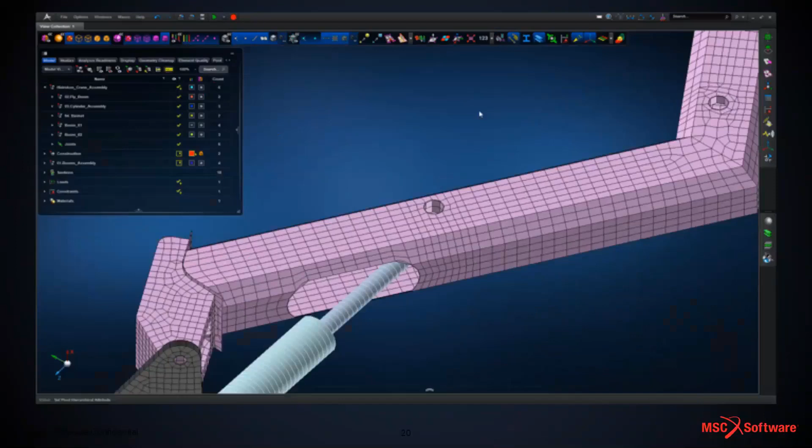We've now introduced the concept of joints into the Apex environment, and this works with an underlying MSC Nastran card definition. Basically, if we've got discrete parts that we want to connect using a joint definition, so we perhaps have some rotation release or something like that - we've got revolute joints, spherical joints, that type of thing.

Here we're going to create a revolute joint between the bore surfaces of the pink member, and then we're going to connect those to the 1D end of the blue entity, and we've got the joint definition generated, and we can see that in the model browser tree.

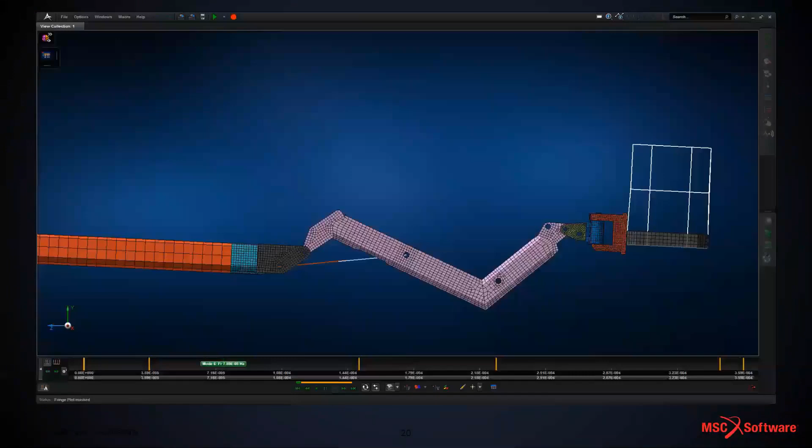If we were to write the model out, we would see the intricacies of how that's being defined in terms of the Nastran deck - local coordinate frames, grids, RBEs, etc. Again, a massive efficiency gain in terms of the way that we can work with this type of data.

Result exploration within Apex. We've got the ability to import and interrogate output from the Nastran HDF5 result file. We've got the ability now to probe 0D, so that could be nodes and elements or joints or fastener connections using the 0D probe, and we've got the 1D probe where we can effectively draw a path along a surface or potentially through a solid thickness and look at the results along that path, getting graphical output in terms of XY coordinates in the Apex environment.

We've got the ability now where we can write results to an external CSV format. This is new to the Apex environment, and again, all of this can be automated using the Python automation tools available to us. So a quick example here.

We've got a sort of crane type structure. We're going to export the bulk data file. We can look at the Nastran deck, and we can even modify that at that level if necessary. We're going to run the Nastran analysis and then read the H5 file back into the Apex environment, importing the Nastran results.

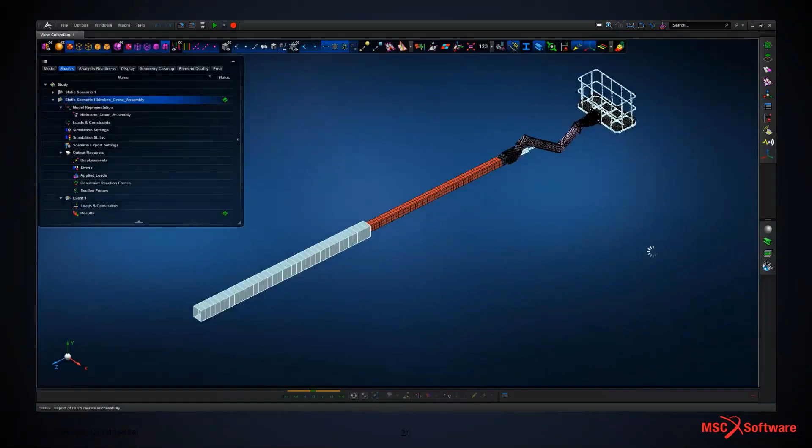Selecting the file we want to work with, we're back into the Apex post-processing environment to allow us to explore the results of the model we've generated. Just a quick deformation plot here.

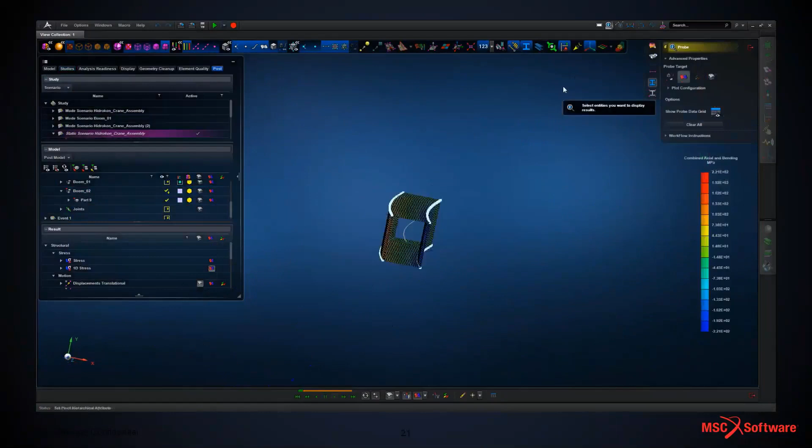We're just going to bring out some of the probing tools, looking at some of the 1D stresses for the bar elements representing one of the simplified booms. Then we can see the stresses at a stress recovery point, one of the corners, and we can use the probe tool to send the probe data to a data grid.

We can manipulate the grid at this level. We can sort, we can remove, we can even modify the numbers if we wanted to do that, and then read the results out to CSV formats for external post-processing. So again, opening up the capability of Apex all the time with this Iberian Lynx release.

We've got some enhancements in terms of customization and automation. The scripting API, or the Python API, is now fully functioning in terms of analysis and results exploration. Previously it only supported model build, but we've now got a capability to automate the whole process. We've got the ability to customize the graphical user interface through the ability to create user-defined forms and link those to scripts that would run behind the scene.

A quick example here, this is a parametric macro we've developed to look at buckling response of a simple plate. But again, what I'm trying to illustrate is the fact that the script is running model build, result solver, and the results post-processing, all in a single environment. So we've effectively black boxed, for want of a better term, the whole process. There's no user input whatever.

So this has significant benefit in terms of company workflow, if you wanted to farm out some of this work to, or to improve the efficiency of this type of work with non-specialist engineers.

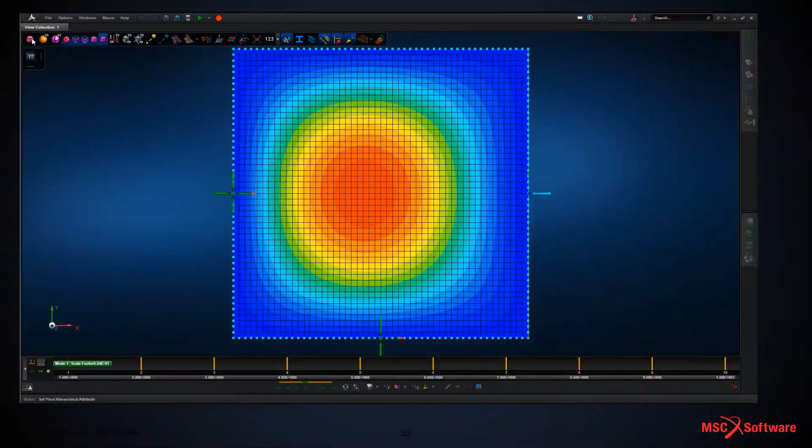So we can look at the result. This is just a linear buckling analysis. We can look at some of the mode shapes, and when we plot a table of the resultant buckling factors, we can see that we have an instability problem, buckling factor less than 1 for a couple of the mode shapes, and we could rerun the analysis to improve those if necessary.

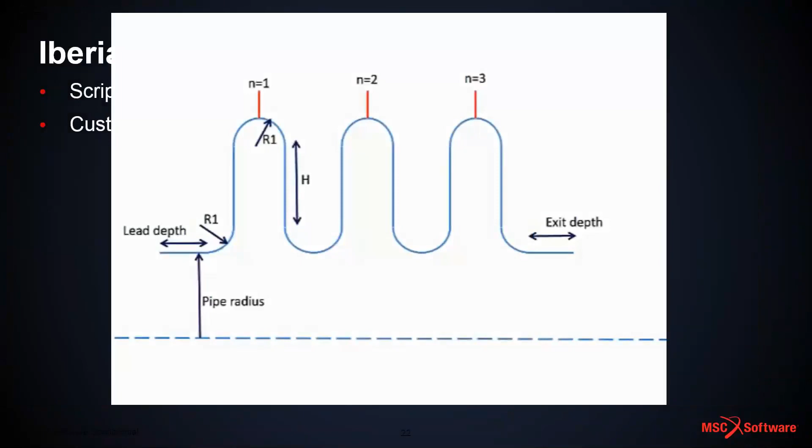Second example now, looking at how we can modify the graphical user interface through the custom tool palette. This is a script that was developed by a colleague in the States, Larry Pierce, so big thank you to Larry. We've got in the custom tool palette a capability for flexible hose, so the model definition in terms of dimensions, thicknesses, material properties, that type of thing is fully defined in the form.

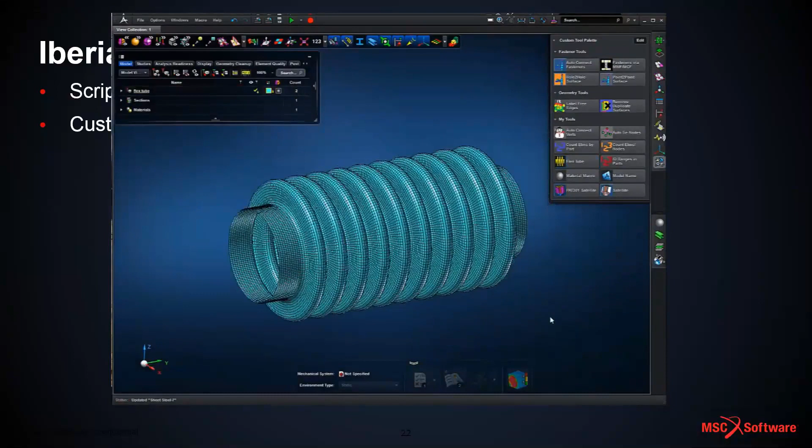One would populate the form as required and then simply run the script. The model is built to those geometric dimensions, the meshing takes place as well, full attribution, and the model's ready to go in terms of analysis and subsequent post-processing. So again, big capability improvement, huge efficiency gains could be achieved with this for your company workflows.

Okay, so that pretty much covers the slides I wanted to take you through today. People talk about tool sets being game changers. My personal view, and that of many people I've worked with in the industry, is that Apex is now at a level to really be a game changer in terms of the ability to generate models quickly, to verify them quickly, and to introduce huge efficiency gains, really taking a lot of the pain and lead time out of the analysis process, thus enabling massive benefits for you and your companies. Okay, thank you.